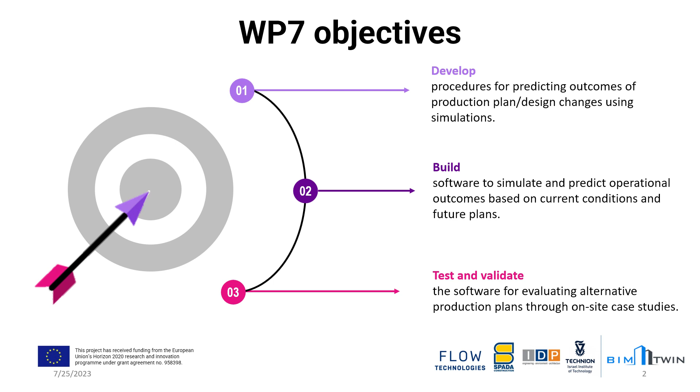In month 13, we delivered the first version of the software for Milestone 3. This was delivered as deliverable 7.6. In that deliverable, we showed a functional prototype of our software at Technology Readiness Level 4. This software has a user input interface that was built in Microsoft Excel. And then we also have a simulation engine that was implemented using the AnyLogic simulation software.

In this deliverable, we've also showed preliminary designs of the recommendation dashboard and potential interactions with the digital building twin platform. If you would like to revisit that deliverable in video form, you can follow the QR code that we show here.

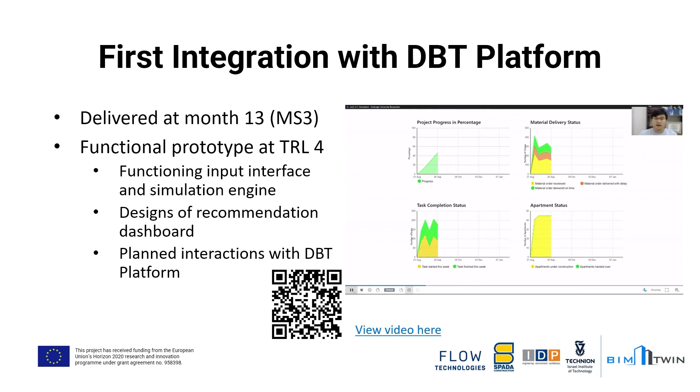Since then, we have developed the recommendation dashboard using Power BI. We have then validated the prototype system using real-world project data from the Suvela pilot project in Finland. We demonstrated this software to 6 project managers from France, Spain, and Finland in Milestone 4 as a part of the demonstration led by Work Package 8.

In the time since that demonstration, we have also enhanced and extended the capabilities of the simulation itself to include simulation of the vertical transport agents such as hoists, elevators, and cranes, to improve the agent behavior in line with the feedback we received. And we have also invested significant development effort to fully integrate the software module with the

digital building twin platform. In this section, we will provide the visualization of the software workflow in Work Package 7, and we hope to demonstrate the logical sequence of actions and interactions between the different components of the software, facilitating a better understanding of how people can use our system effectively. Let's start with an overview of the system, illustrated in a user flow diagram.

Typical users of the software are project managers and site engineers. They will begin from the digital twin core dashboard developed by Work Package 2. There, the user can review the latest status of the project recorded in a digital building twin platform. Recall that the status is compiled from the information collected on site and in the supply chain by the tools built by Work Packages 3 to 6.

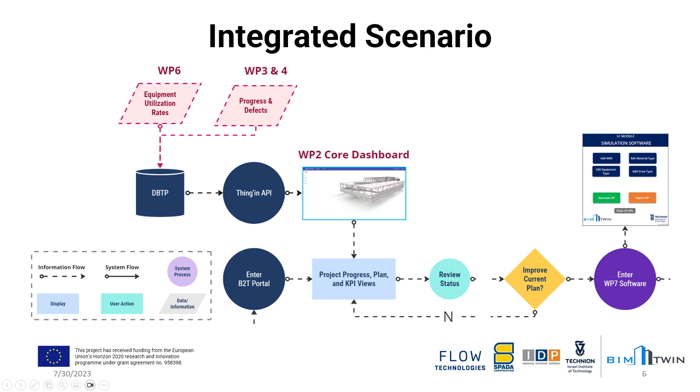So if the user determines a need to improve the current production plan, then they would launch the prediction and recommendation module prepared by our Work Package 7. So the user is first greeted by the input interface. Here, they can define different production system configurations or what-if scenarios for the simulation engine to run.

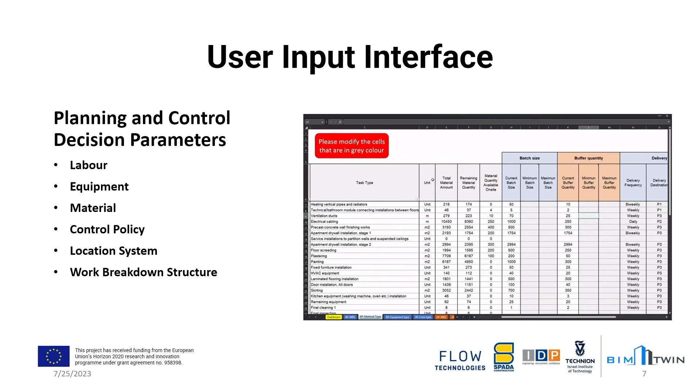They can change the parameters of resource allocations, production control policies, supply chain configurations, location breakdown zoning systems, and task dependency sequences. Once they define the range of parameter values needed for the scenario, the software compiles a set of alternative production plans and sends them to the simulation engine.

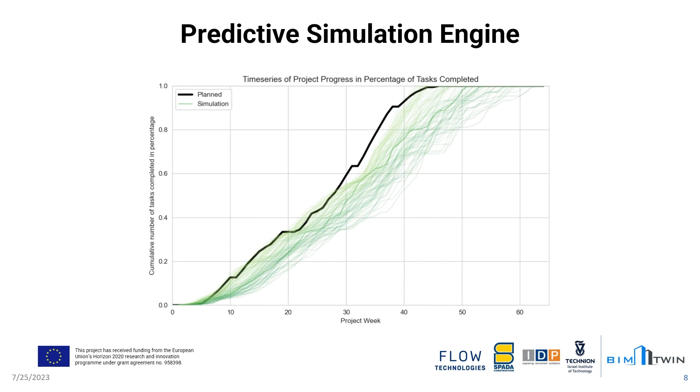The simulation engine runs each alternative production plan configuration 50 times. The simulation exposes this production system to different combinations of risk and uncertainty that occur on the construction site, such as supply chain disruptions or severe weather conditions.

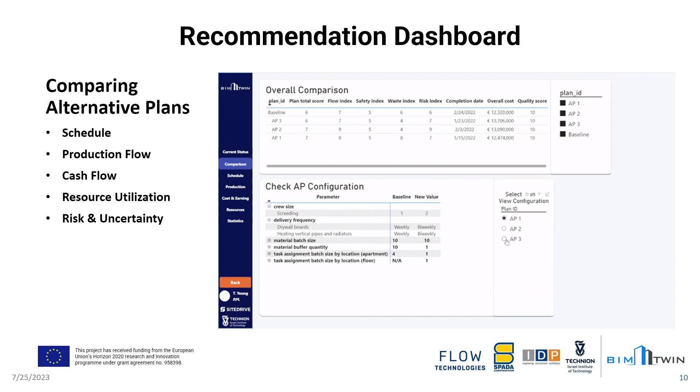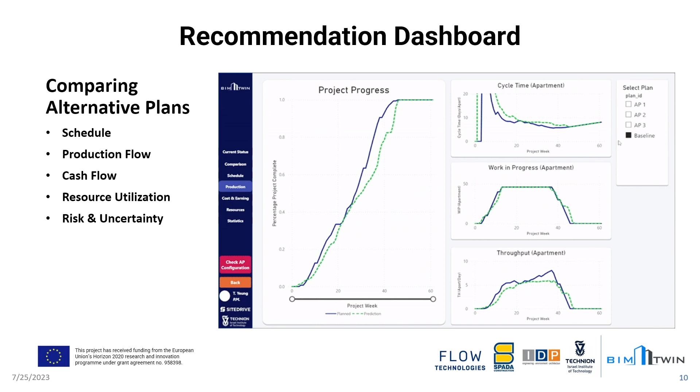Once the full set of alternative production plan configurations has been simulated, the module is ready to present the result to the users. Our software analyzes the simulation results and displays them in a recommendation dashboard developed using Power BI. Here, the user can compare the predicted performance of each plan against each other. If the user finds any particular plan favorable, they can select it in the dashboard and that plan will be uploaded to the digital building twin platform as the new baseline plan.

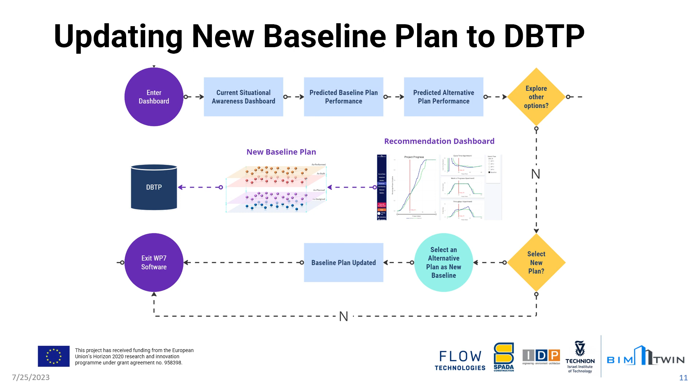Now, let us demonstrate the software with a realistic use case with the Suvela pilot project. Suvela pilot project is a large-scale residential construction project in Finland. And at month 8 in the project, the interior finishing works are at their peak. Because of congestion of workers and material on site, the progress began to slow compared to the planned schedule.

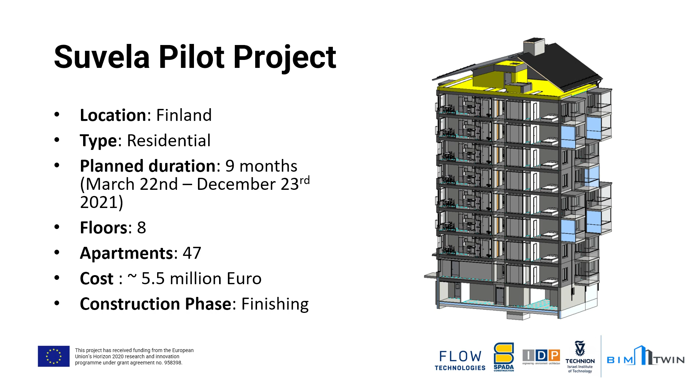After reviewing the status from the core BIM2Twin dashboard, the project manager decides they need to find a solution that will put the project back on track. So they initiated the Work Package 7 software. Once initiated, our software retrieves the most up-to-date project status and intent information from the BIM2Twin Thinking Graph database. This module was implemented using a combination of Python scripts and RESTful Application Programming Interface, or API for short.

After initiating the software, the project manager is now looking at the input interface. In here, they need to define one or more alternative plans that they want to explore. In the case at hand, the project manager felt most comfortable with changing the labor configurations.

So for the first plan, they increased the crew size for 5 activities: electrical cabling, service installations to partition walls, the drywall installation part 1 and part 2, and also the floor screeding. These are the 5 activities that are most imminent in the next look-ahead planning phase.

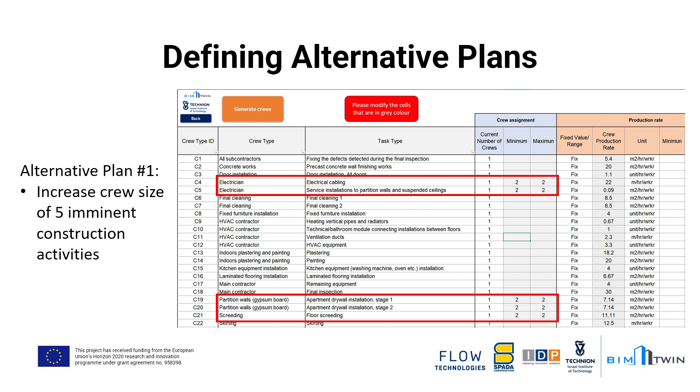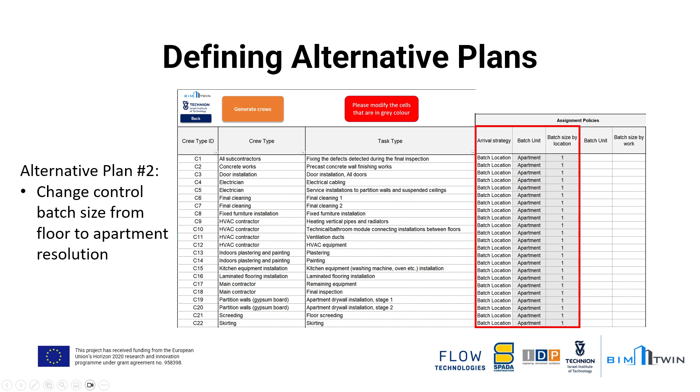Next, for the second plan, the manager tried to adjust the task assignment batch size from a floor resolution to an apartment resolution, meaning that they want to assign tasks to the crew by one apartment at a time rather than one floor at a time. And after defining these 2 plan configurations, they submit them to the simulation engine for analysis.

And here we want to showcase part of our agent-based simulation engine developed in AnyLogic. In our implementation, an agent is composed of 4 parts: the agent parameter, the perception variables, the behavior functions, and the agent state chart. Here we show the work crew agent. You can see the parameter variables functions on the left-hand side and the main state chart on the right-hand side. The state chart is a form of decision tree that dictates how the agent navigates through the environment and calls in behavior functions to perform action to the environment.

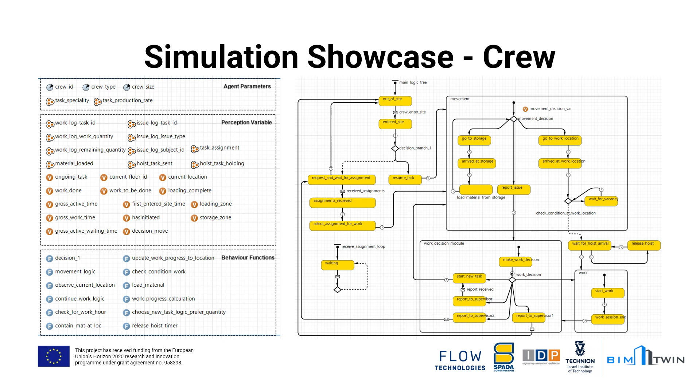Here you see the work crew agent going through a cycle of work. The crew first receives instruction from the supervisor, then selects a task from the assignment log, and moves either to storage or to the work location. If there are material and equipment that need to be hoisted to the location, the work crew will send a hoist request to the crane, wait for the item to arrive, then unload or install the item, and finally release the crane. After all that, they will start working on the remaining parts of the task. And once done, they will report back to the supervisor.

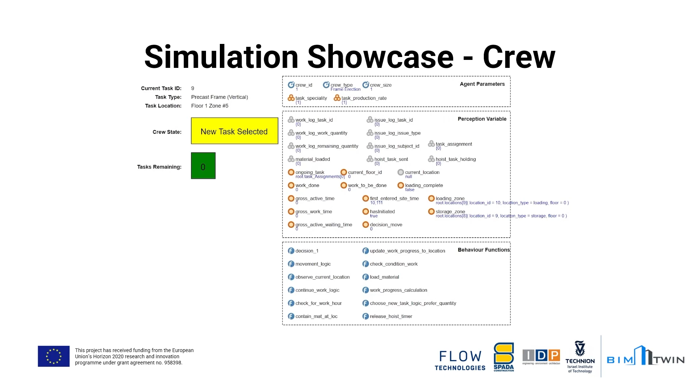Next, we're showing the hoisting agent. This is a new agent that we have programmed recently, and it covers cranes, material hoists, and elevators. For the crane, the agent goes through a cycle of receive requests from the work crew, go to the loading location, load, transport, hold for the crew to unload or install, and finally being released for the next task.

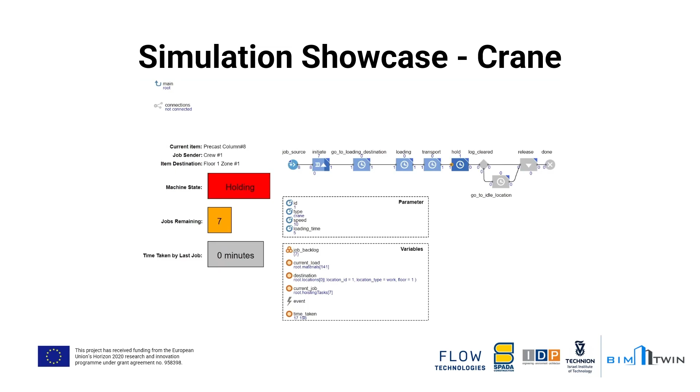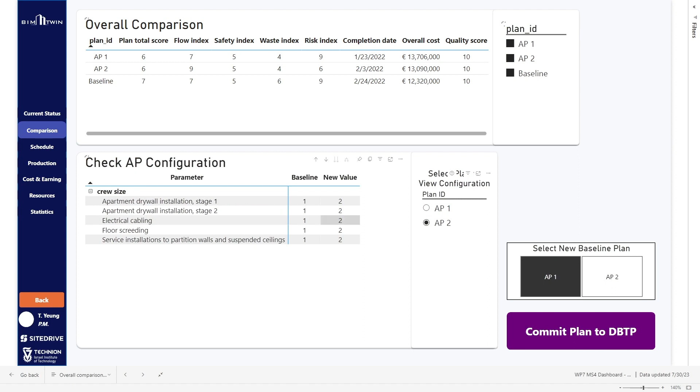Once the simulations are done, the manager can view the results in the recommendation dashboard. In the dashboard, they can see that both the alternative plans will perform better than the original plan. Comparing the two alternatives, they can see that the plan with the increased crew size, alternative plan number 1, will cost the project more but finishes faster and is less risky. The second plan, which reduces the production batch size from floor to a single apartment, doesn't add extra costs but is more risky. One can see the difference in risk in the Statistics tab of the dashboard.

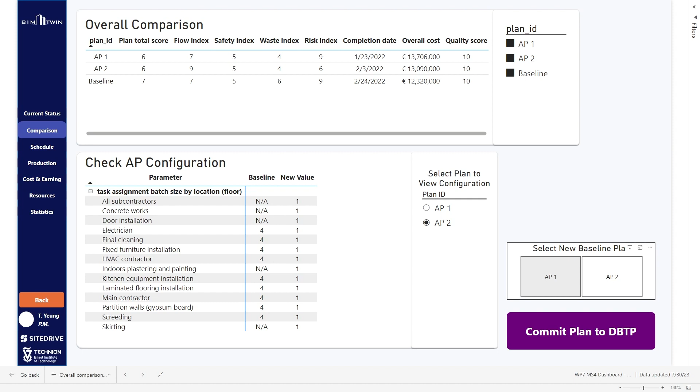This concludes Work Package 7's Milestone 4 deliverable. To summarize, the software has now achieved TRL Level 5. The main upgrades since the last version were enhancement to the simulation engine to incorporate vertical transport operations, the development of the recommendation dashboard, and the full integration with the digital building twin platform.

So far, we have only validated our software through the Savella pilot project. This is because we need a large, high-resolution, and high-quality dataset to test the software properly. And the data collection process is both manual and time-consuming. And so far, we have only collected everything we need for the Savella project. But now we're in the process of collecting data for the Mislata and Postialchio project for the upcoming demonstration. So, in the next version, we'll focus on integrating live pilot project data to push the software to TRL Level 6. We will also work on improving and validating the performance of the predictive simulation engine.